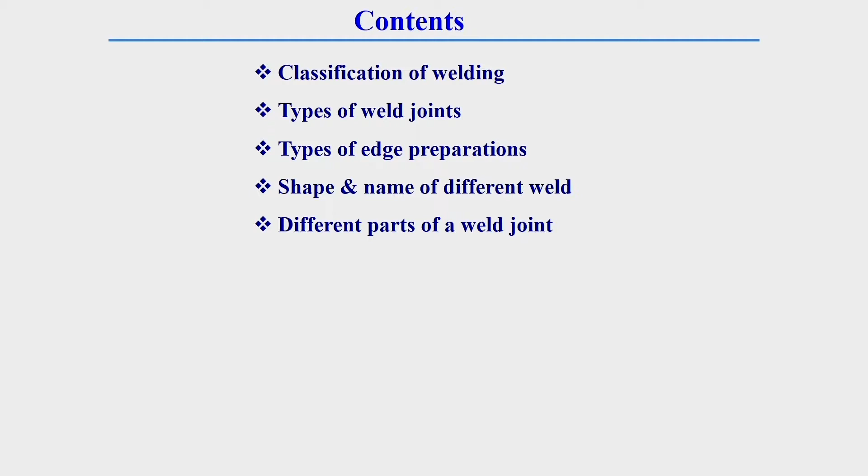This is the content of today's lecture: classification of welding, types of weld joints, type of edge preparation, shape and name of different welds, and different parts of a weld joint.

Classification of welding I already started in yesterday's class, where we saw different aspects. Based on different aspects we can categorize the welding process into 6 different categories: depending upon the source of heat, depending upon the application of pressure, depending upon the different phases of base and filler material, depending upon the composition of the joint, depending upon the position of electrode, and depending upon the mechanism. In the previous lecture I already discussed source of heat and its categories in detail.

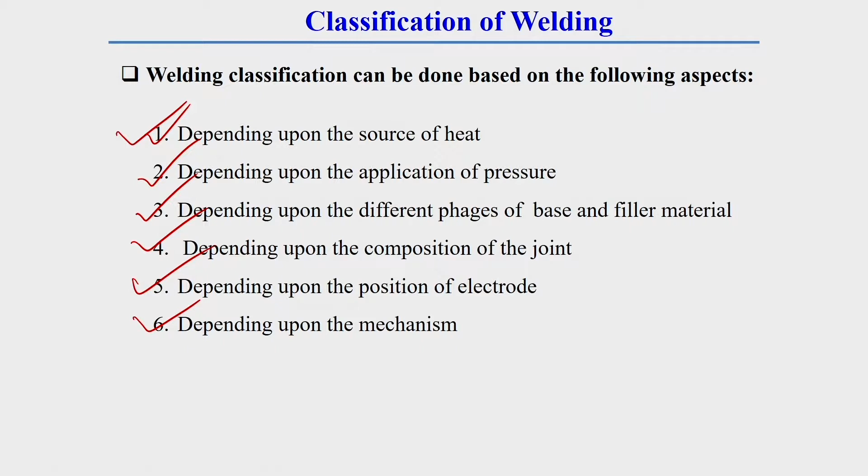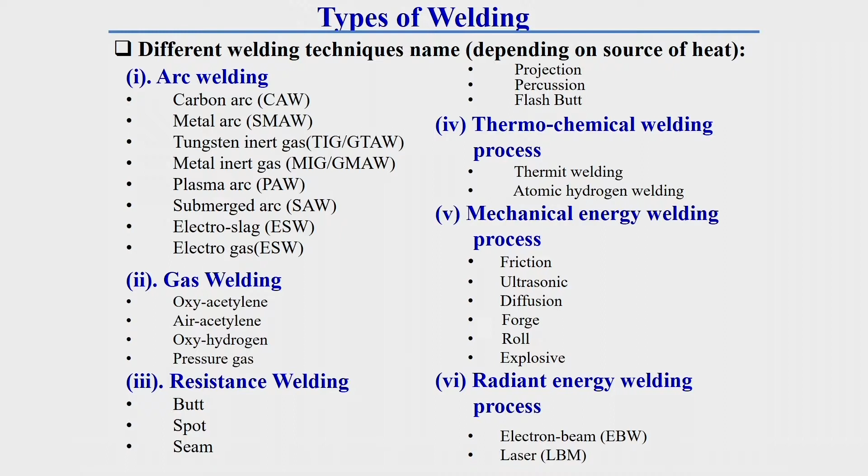This is the different welding techniques which generally categorize depending upon the source of heat, which I have already explained in detail. Now we will discuss the rest of the welding categories.

Depending upon the application of pressure, welding can be further categorized into 2 different categories: one is pressure welding, another category can be non-pressure welding, which is sometimes called fusion welding. This is popularly known as fusion welding.

Generally in pressure welding, the pieces of metal to be joined are heated to a plastic state and forced together by external pressure. As external pressure is applied for joining, this is called pressure welding. This is also known as plastic welding, because here the temperature does not go beyond its melting point. The material is plasticized and joined together, which is why it is called plastic welding.

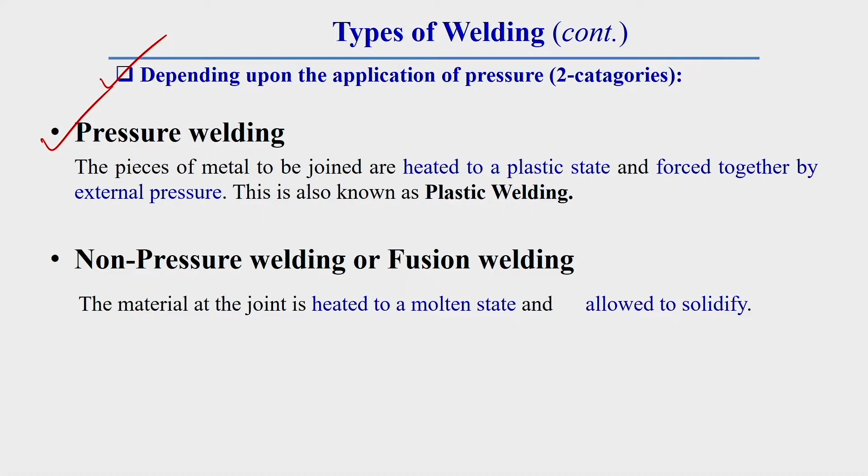Now in non-pressure welding or fusion welding, the material at the joint is heated to a molten state and allowed to solidify. Here the temperature goes beyond its melting point, so the metal becomes liquefied. No external pressure is required to join the metal. Here, due to this intermetallic fusion, that means due to fusion of molten metal, joining takes place.

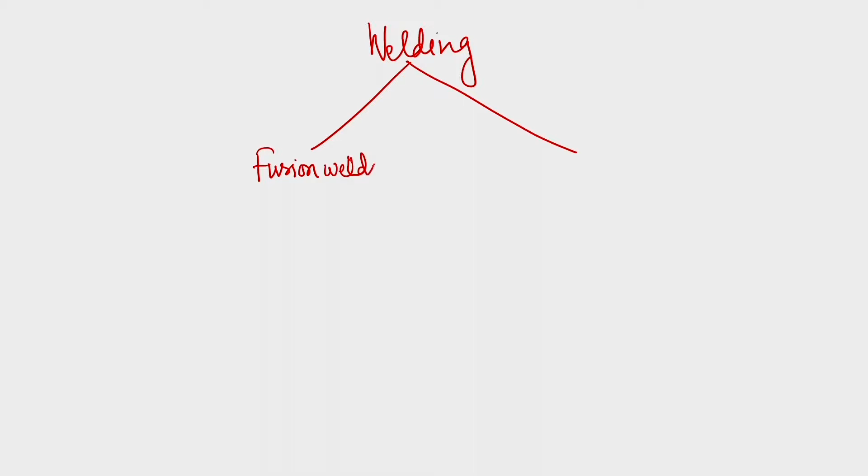Now pressure and non-pressure welding can be grouped with the welding techniques I already mentioned in classification by source of heat; similar welding categories can be put together here. Depending upon application of pressure, welding can be categorized into 2 different categories: one is fusion welding, another one is pressure welding. This fusion welding is also called non-pressure welding.

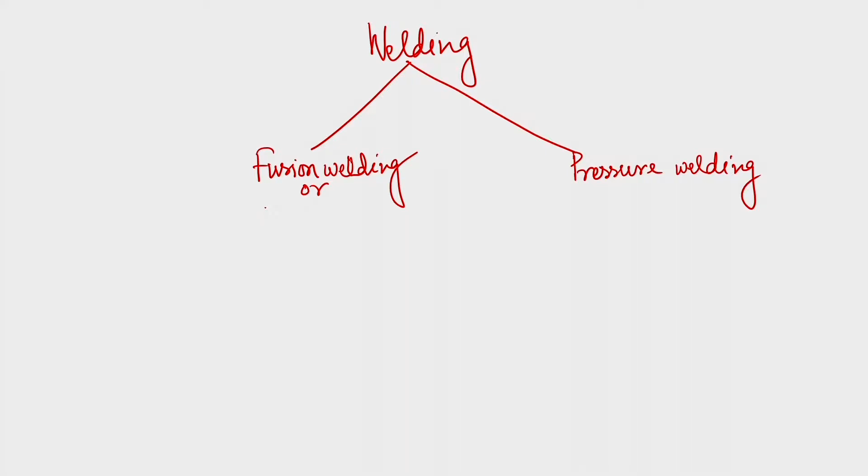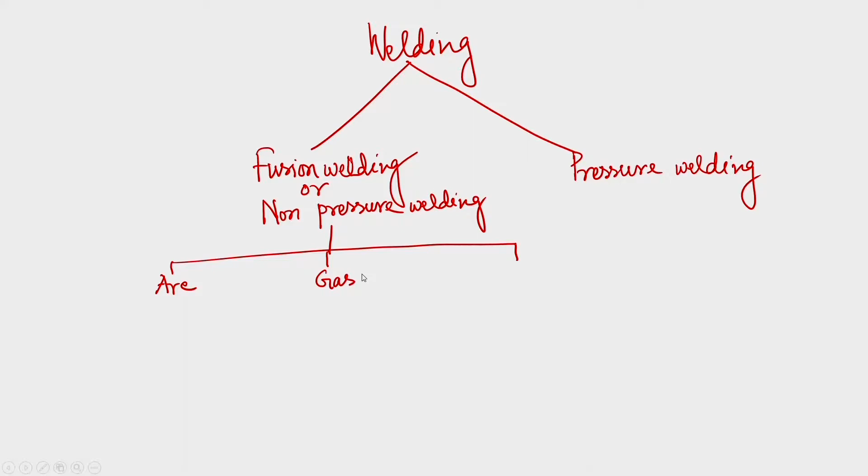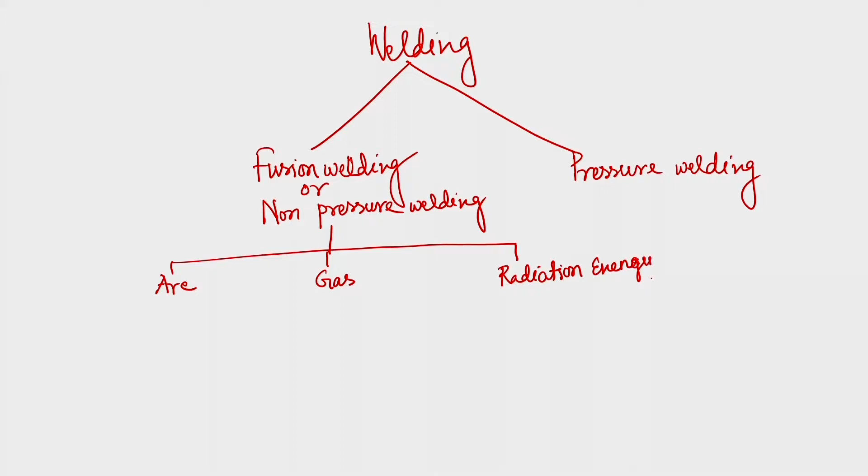In the fusion welding category falls all welding processes in the categories of arc welding, gas welding, and electron beam or radiation energy welding. In fusion welding the temperature goes beyond its melting point. These categories include all arc welding processes, gas welding processes, and radiation energy processes.

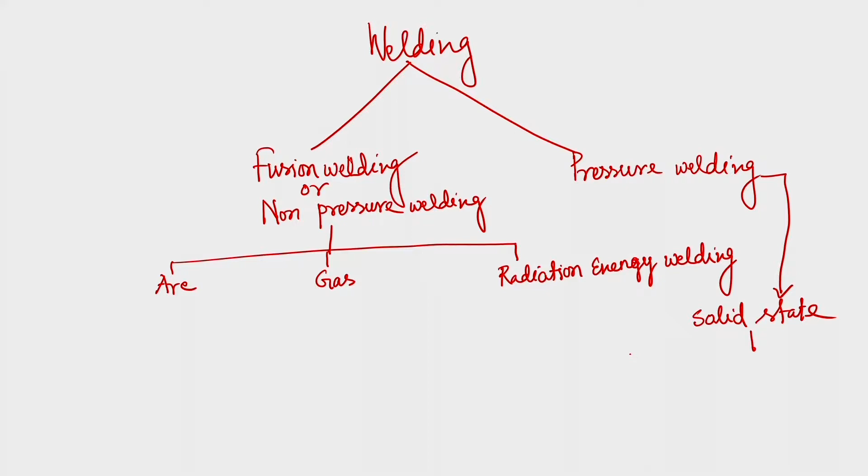In case of pressure welding, solid state welding processes generally come into these categories. This solid state welding can be grouped into two different categories: one is resistance welding, and another one is friction welding.

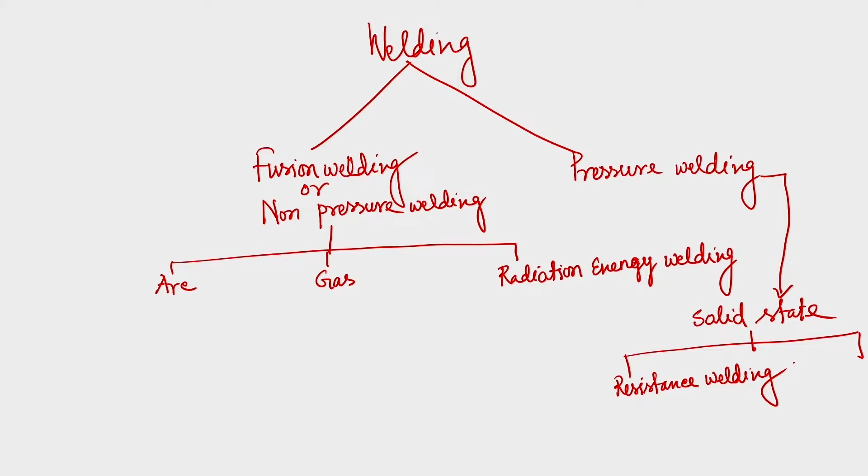So, depending upon application of pressure, welding can be categorized into non-pressure welding or fusion welding, or it can be pressure welding. Generally, non-pressure welding consists of all gas welding, arc welding, and power beam welding techniques. Whereas pressure welding techniques generally involve different types of plastic or solid state welding processes, where the material becomes plasticized and, due to application of pressure, is joined together.

In this category there can be friction welding, ultrasonic welding, cold pressure welding, induction welding, and in resistance welding there can be different types like spot, seam, projection, butt and flash welding. And generally in non-pressure welding, as I already told you, all the welding techniques I explained fall under gas, arc and power beam welding categories.

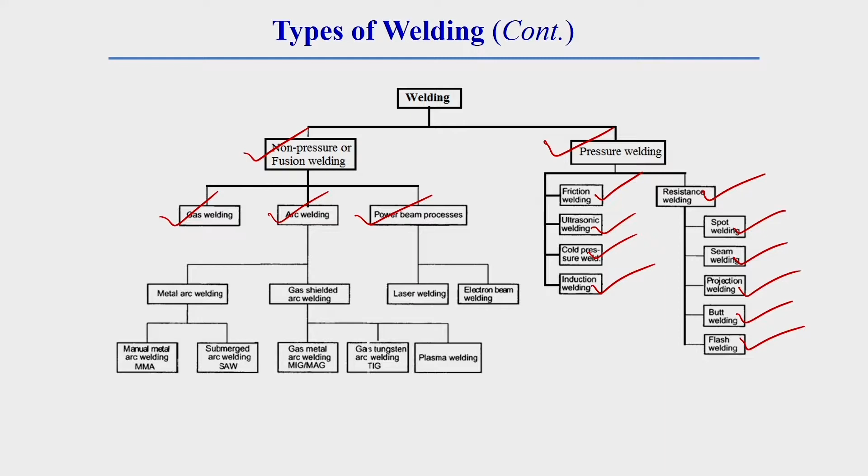Now, depending upon the different phases of base and filler material, this welding can be further categorized into three different categories. That means phases, especially whether it is liquid phase or solid phase. Generally during welding the material we are using can go to liquid state, solid state, or there can be both liquid and solid state.

So what happens if the material goes beyond its melting state, that is called liquid state welding. That means here the phase is liquid. Then in solid state welding, generally the temperature does not go beyond its melting point. Here the material is in solid state, that is why this is called solid state welding process. And solid-liquid state means one part of the material is in solid state and the other part is in liquid state, that is why it is called solid-liquid state welding.

Especially in case of solid-liquid state welding, the filler material which we are using for joining goes beyond its melting point, and the parent material which is used to join generally does not go beyond its melting point.

Generally in liquid state welding process, all fusion welding or non-pressure welding processes are in this group. Then in solid state welding, this can be friction welding, ultrasonic welding, diffusion, forge, roll, or explosive welding. And in solid-liquid state welding process this can be soldering and another one is brazing process.

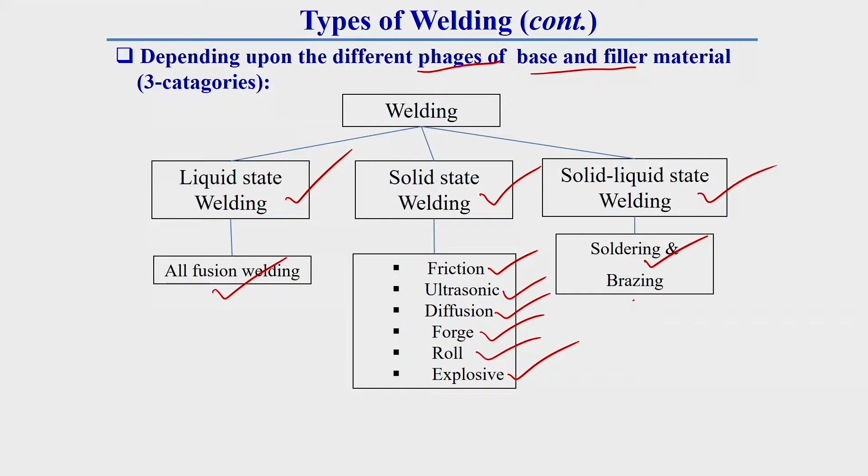Now, depending upon the composition of joint, this welding can be further categorized into three different categories: autogeneous, homogeneous, or heterogeneous. In autogeneous welding, no filler material is used during joining, that is why it is called autogeneous welding process. In this category, all solid state welding or solid phase welding falls.

Here there will be resistance welding and non-consumable welding process. Non-consumable welding process means where there is no use of filler material to fill the gap between two pieces of metal or material.

In homogeneous welding, generally the composition of filler material and the base material or parent material is the same, that is why this is called homogeneous welding process. In homogeneous welding process, all arc welding, gas welding, and thermit welding processes come.

Then in heterogeneous welding, the filler material and the base material which we are going to join have different compositions. Generally in these categories, soldering and brazing come.

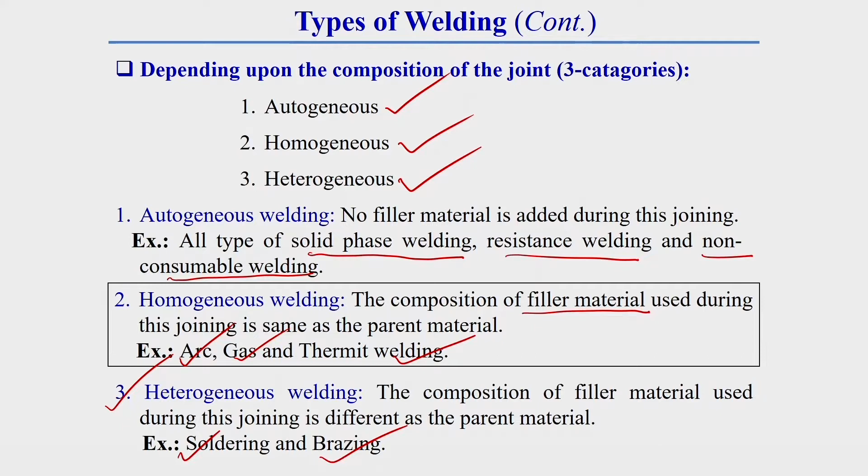Now, depending upon the position of welding, this welding can be further categorized into 5 different categories: downhand or flat welding process, horizontal process, vertical down welding process, vertical up welding process, and overhead welding process. These welding processes are arranged according to the complexity of the process.

This downhand welding process is the easiest process, because here the filler material is deposited toward the direction of gravity, that is why it is the easiest welding process. And this overhead welding process is the most complex welding process, because here the electrode or filler material has to be deposited against gravity. So this is a tough welding process, the most complex welding process according to the position of welding.

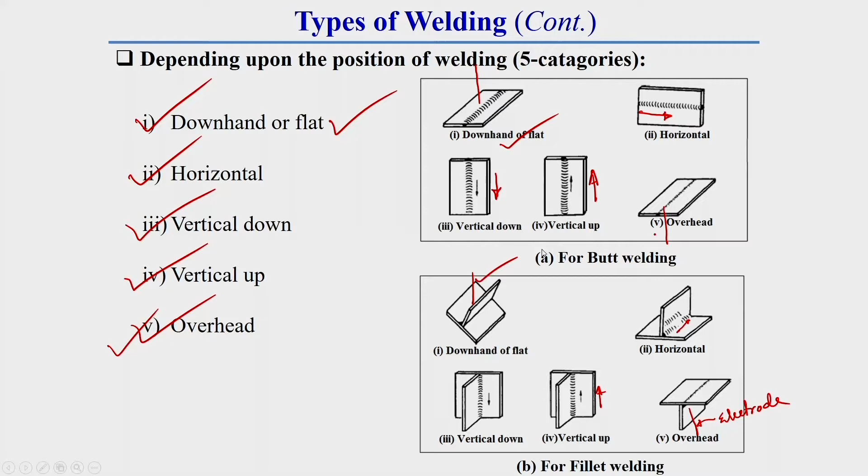And this is the overhead welding process, where the electrode is put against gravity. That is why this is called overhead welding. From this figure one can easily observe that this overhead welding technique is more tough, and the easiest welding process is downhand welding.

Now, depending upon the mechanism, welding can be categorized into 3 different categories: manual welding, semi-automatic welding, or fully automatic welding.

Before going into details about manual and semi-automatic welding, we should know two very important parameters of welding. One is called feeding of electrode, and another is called welding speed, or traverse speed, sometimes called transverse speed.

Generally, feeding of electrode: in welding, to deposit the filler material, there is a continuous movement of feed of electrode, and that has a speed. This is a very important parameter, as it decides how much molten material should be deposited along the welding region.

Welding traverse speed means what should be the speed of welding per second or per hour, that is, how much length of welding should be done per minute, per second, or per hour. These two parameters are very important.

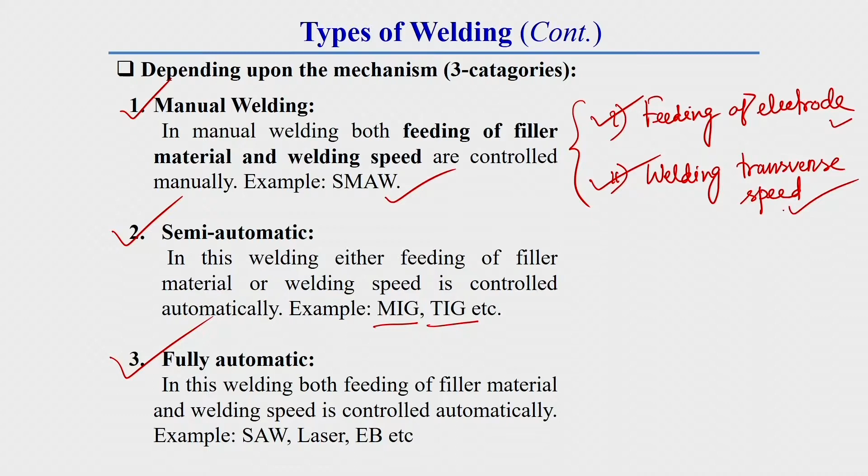Fully automatic means both parameters, feeding of electrode and welding traverse speed, are controlled automatically. In this category there are many latest welding technologies, like submerged arc welding, laser welding, and electron beam welding.

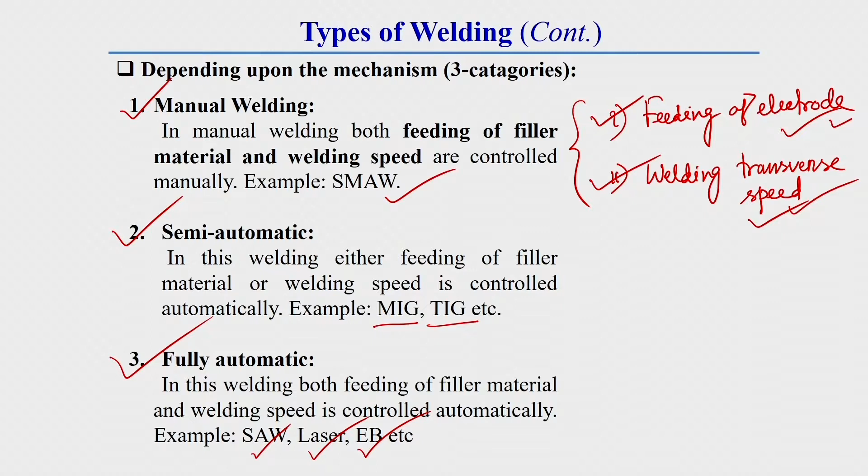We have already discussed different welding processes. Now we will see the different types of weld joints. Generally, there are 5 different types: butt joint, T-joint, lap joint, corner joint, and edge joint.

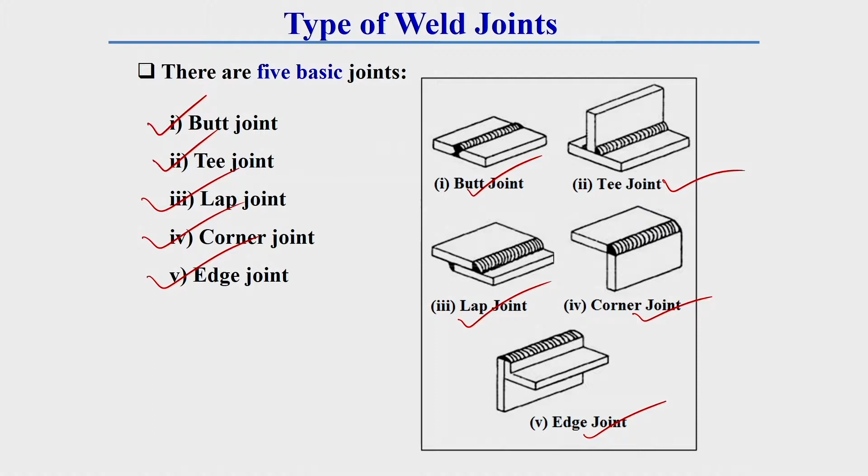Before going into details about butt welding and different types of welding joints, I will discuss edge preparation of weld joints. Edge preparation or edge shaping may be applied to each piece in the same way, or a combination of joint preparations may be used. The edge preparation for a welding joint depends on strength requirement and other design considerations.

There are generally 6 different edge preparations commonly used for welding joints. These are square edge — in this preparation, the edge of the workpiece has a shape which is square in nature.

That means there is no edge preparation. So that is why this is called square edge preparation.

Then the second edge preparation is bevel edge preparation. In this category, a bevel type of shape is provided - this is bevel edge preparation, where a shape of angle is put in the workpiece.

Double bevel edge preparation is generally used for thicker sections, where the bevel angle is made from both sides of the plate, top as well as bottom.

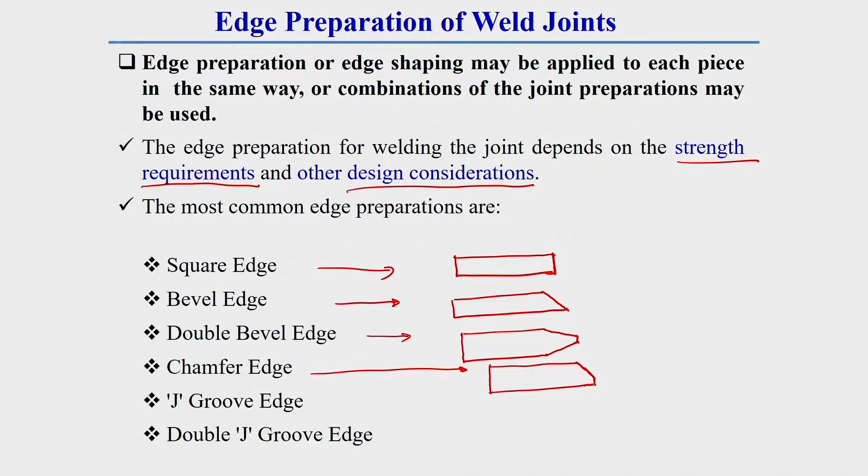Then in chamfer welding, the chamfer edge preparation looks like a bevel with a root face. This is generally the chamfer type of edge preparation.

There can be J groove edge preparation, where the edge of the plate looks like a J shape. This can also be double J groove, which is generally used for thicker weld plates.

From this side as well as from this side, this is generally double J - from the top side of the plate as well as the bottom side, edge preparation is done. So these are all the edges which are generally prepared for strength requirement or design consideration of the welded joint.

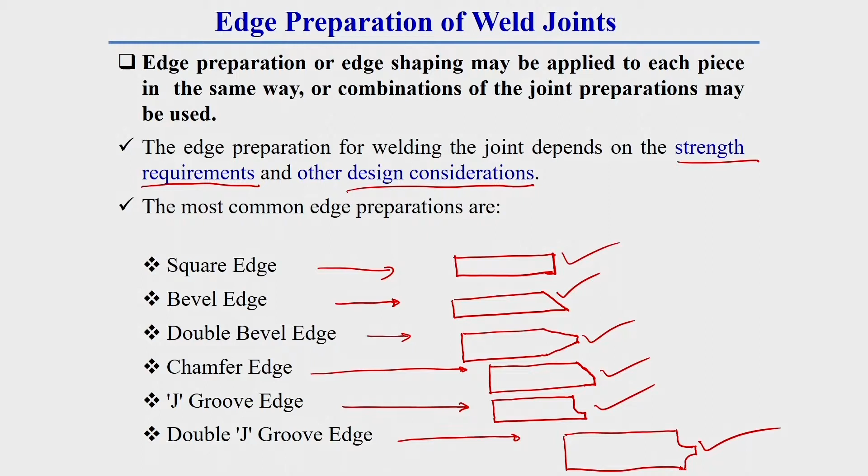So there are generally 6 different types of edge preparation. Now depending upon the weld joint and edge preparation, all welding has been categorized into many different categories, like different butt joints with their edge preparation.

By applying different edge preparation in butt joints, there can be different types of butt welding joints. Here generally the edge preparation is done - in the first category, square type edge preparation is done. That's why this welding process is known as square groove butt joint.

Because here square edge preparation is used for which type of joint? Butt joint. Now before going into details about all these categories, we should know what a butt joint is.

A butt joint is formed generally when the pieces to be welded are laid side by side - this piece and this piece laid side by side. So all the joining categories, all the weld joints shown here, are all butt joints - different types of butt joints.

Here generally bevel type edge preparation is made, that's why this welding technique's name is bevel groove butt joint. Here, as this bevel is made on both top and bottom side of the plate, that's why it is called double bevel butt joint.

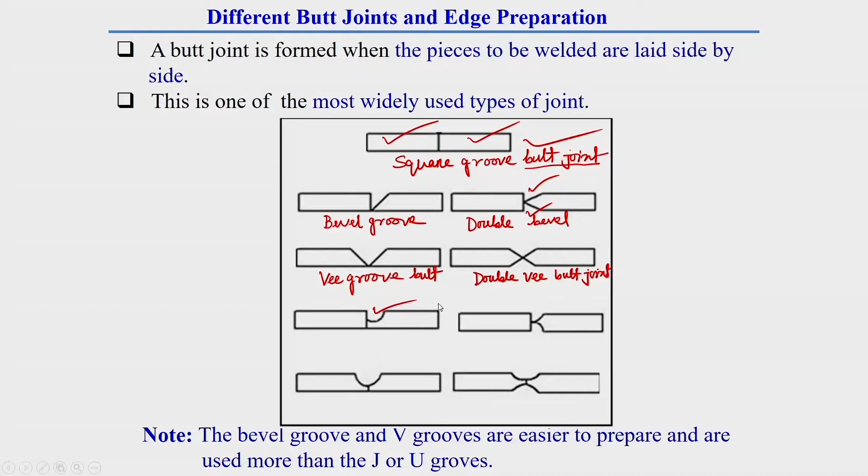Here, as this V is put on both top and bottom side, that's why this is called double V butt joint. Similarly, as this J shape or J edge preparation is made here, that's why it is called J groove butt joint.

As this J is put on both top and bottom side, that's why it is called double J butt joint. So in this way, depending upon the edge preparation and type of joint, there can be different types of welding joints for butt welding categories itself. So this is generally called U groove butt joint.

Because here the shape of the edge preparation looks U type, and this is called double U groove butt joint, because here both top and bottom side U groove is made.

Now we should know a little bit why this top side, bottom side, why double side, single side edge preparation is required. This edge preparation in the welding joint is required because of different reasons. The main reason for this edge preparation is that proper accessibility of filler material in the welding or joint region is very much essential.

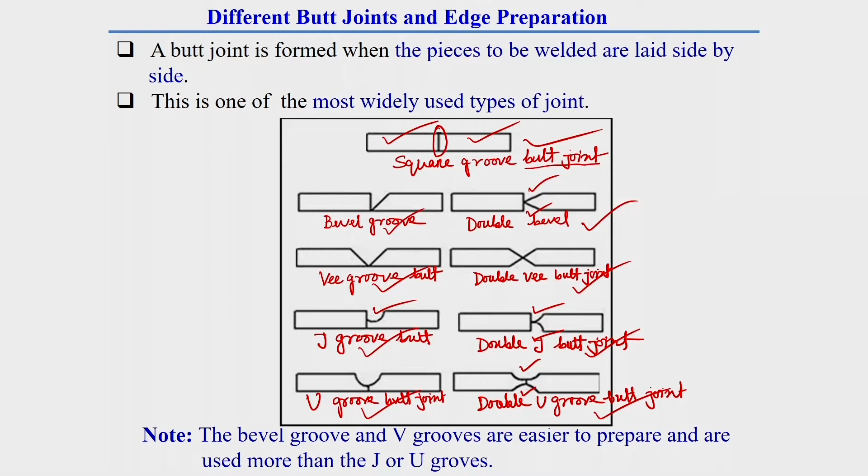Now the T joint. A T joint is formed when one piece of metal to be welded is placed vertically on another piece lying horizontally, to form the shape of an inverted T. Inverted T means this is the inverted T shape.

In this T joint, the bottom piece is called the flange, and the top vertical one is called the web of the structure. The vertical member is placed at an angle of 90 degrees to the horizontal member.

The type of weld used here is generally called fillet weld. The joining done in fillet welding is called fillet weld. The fillet weld resembles a triangle when viewed from the side of the structure, from the side of the welded joint.

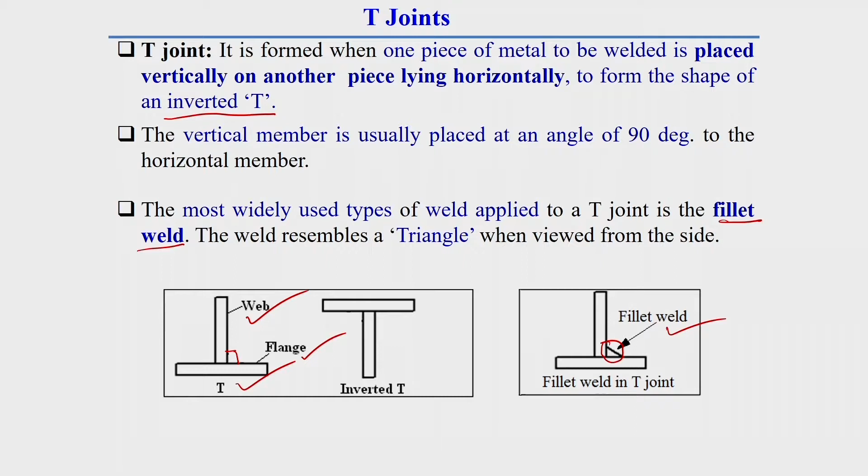Now different types of T joints are explained. This T joint's vertical piece can also be prepared using a bevel or J shape. If the bevel shape is made, then this is called a bevel T joint, because here the vertical piece preparation is done in a bevel shape. That is why it is called bevel T joint.

If both sides of the vertical piece are beveled, then this is called double bevel T joint, because on this side and this side, both generally have a bevel made.

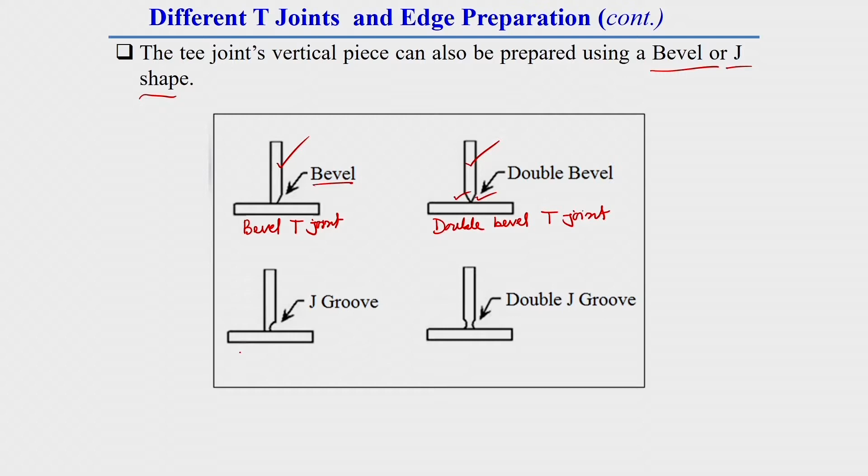If in a vertical piece a J shape or J groove is made, then that is called J groove T joint. And if this J groove is made on both sides of this vertical piece, then that is called double J groove T joint.

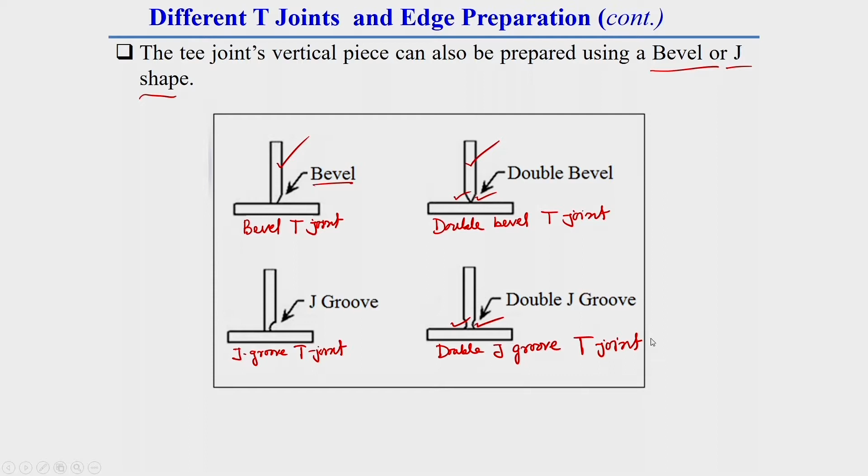Now different types of lap joint. First we should know what a lap joint is. A lap joint is formed when one piece to be welded is laid down and another piece is overlapped to form an edge for fillet welding or an area to allow plug or slot welding. That means two pieces of material are put together and overlapped with each other.

This lap welding can be divided into three different categories depending upon the joining process: it can be fillet welded lap joint, plug welded lap joint, or slot welded lap joint.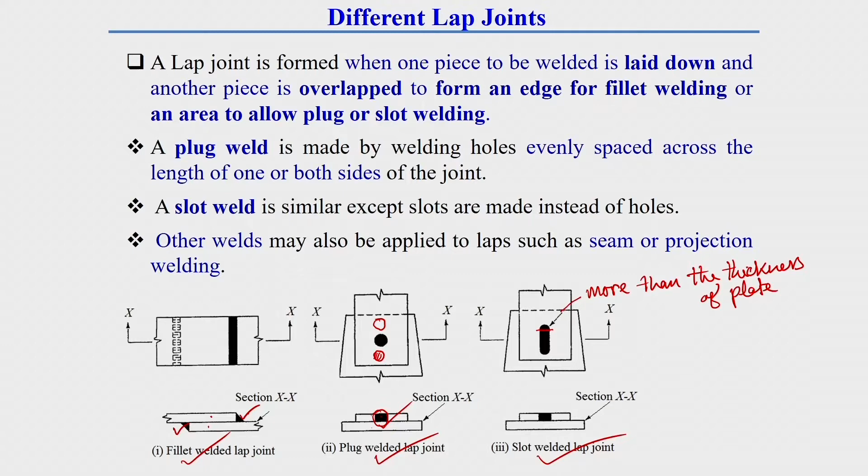the thickness of the plate. So the difference between plug and slot welding: in plug welding, a circular hole is put, whereas in slot welding, a slot is put. Apart from this, other welds may also be applied in lap joints, such as seam or projection types of welding.

Now, different types of corner joints and their edge preparation. A corner joint is formed by placing one piece to be welded on the other, so that a corner is formed. It may be flush, half open, or fully open categories.

For proper penetration and strength, an edge preparation may be applied to one or both of the pieces of the joint. There are different categories of corner joints, where generally a corner joint is formed by placing one piece to be welded on the other, so that a corner is formed everywhere.

This corner joint, depending upon its edge preparation, can also be of different types. The first one is called flush corner joint. The second one is called half flush corner joint.

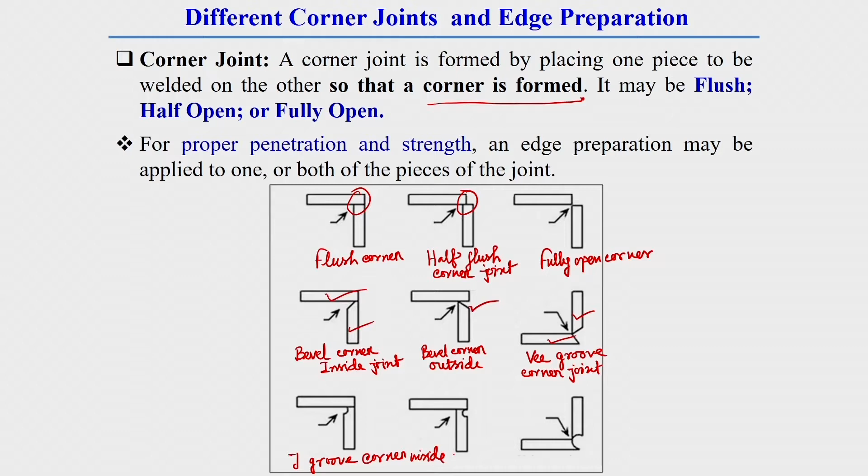This one is called J groove corner inside joint. Here the J groove is made inside, that is why it is called J groove corner inside joint. Here the J groove is made outside, that is why this is called J groove corner outside joint, and this one is called U groove corner joint. Here a U shape is made, that is why it is called U groove corner joint.

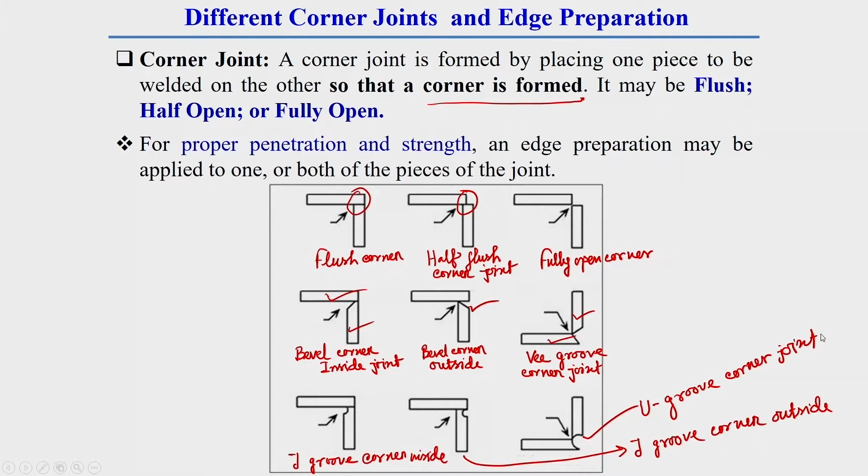Now these are the different categories of edge joint and their edge preparation. An edge joint is formed when the two edges of the pieces to be welded come together.

This joint is not as widely used as other welding processes like butt, corner, or T joints, which are the joining processes widely used, but this edge joint is very rarely used. Here, the first category has no edge preparation, that is why this joint is named square groove edge joint.

This second category is called bevel groove, made in one plate or one piece of material, that is why it is called bevel groove.

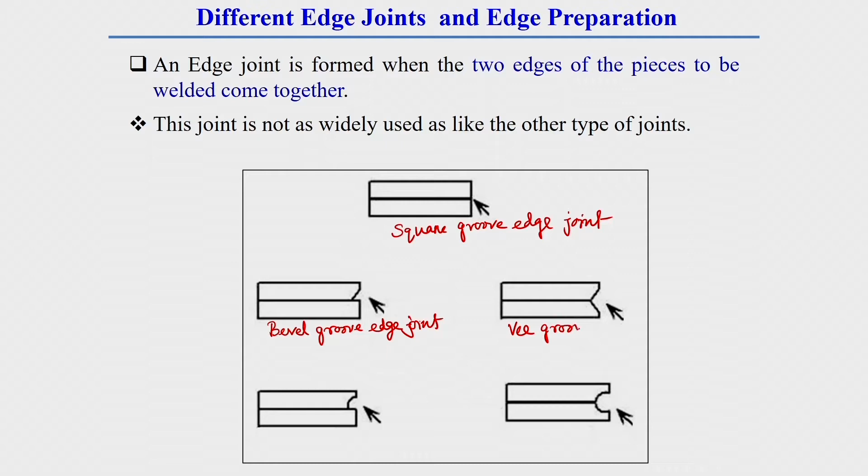Edge joint - so here will be the edge term, that means edge joint term. This will be V groove edge joint.

Here as J groove is made, that is why it is called J groove edge joint. And as here the U groove is made, that is why it is called U groove edge joint.

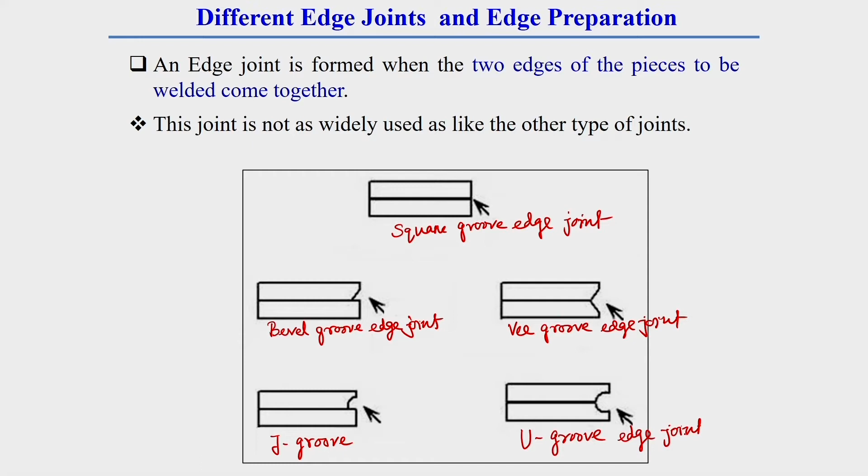These are all different categories of weld joint and their edge preparation. These are very important things which are very much essential once you will be in industry.

Now here these are all joints you have seen. Now we will see what are the shapes of weld of all these joints. The shape of the weld can be butt weld, the shape of the weld can be fillet weld, or the shape of the weld can be compound weld.

So butt weld is done along the thickness direction of the plate, whereas fillet welding resembles triangular shape, which I have already explained. If in a structure there is a combination of 2 or 3 different types of weld, then that weld is called compound weld. Here you see both butt as well as fillet welding part is there, that is why this is called compound weld.

So there can be edge weld whose shape looks like this. Generally this weld is put at the edge of the plate, and I have already explained about plug welding and slot welding also.

Plug welding, here the shape of the weld, once you see the side view, looks like this, and once we see the slot welding it looks like this. But in case of plug weld, generally there is made a circular hole.

In case of plug weld and spot weld, generally this is actually slot weld, not a spot weld. This is generally slot weld. Here instead of putting a circular hole, generally a slot is put with round shape at the edge of that slot.

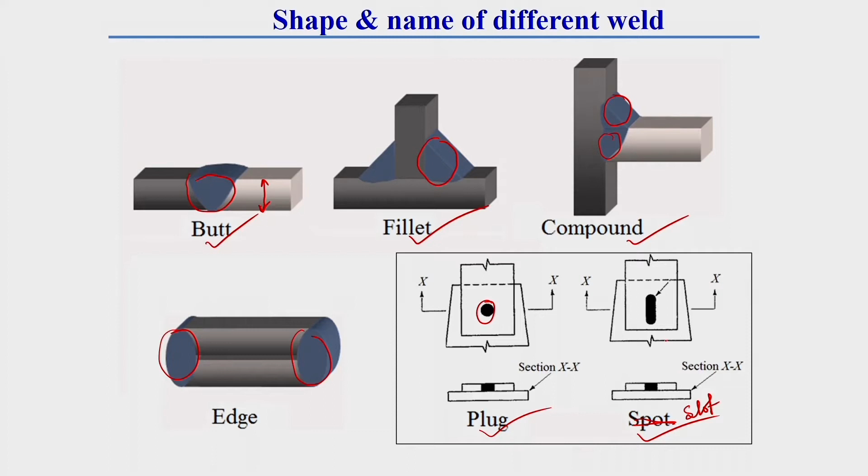Now we will see what is the name of different types of butt weld and their joint. Here you see, once we go for filling this gap, this name - what should be the name of this, or what we should write in this gap - that we should know, like shape and name of different types of weld.

Here you see, as the butt welding is done in butt joint, that's why this name should be butt welded butt joint.

Here in case of butt joint, as the triangular shape weld is made, that fillet welding, that's why it is called fillet welded butt joint.

In this case, two different thickness plates are laid side by side - this is one bigger thickness of plate, this is another smaller thickness of plate. So here generally two different types of weld are made here. One is generally butt weld, and this triangular shape outside of this thickness is generally called fillet weld.

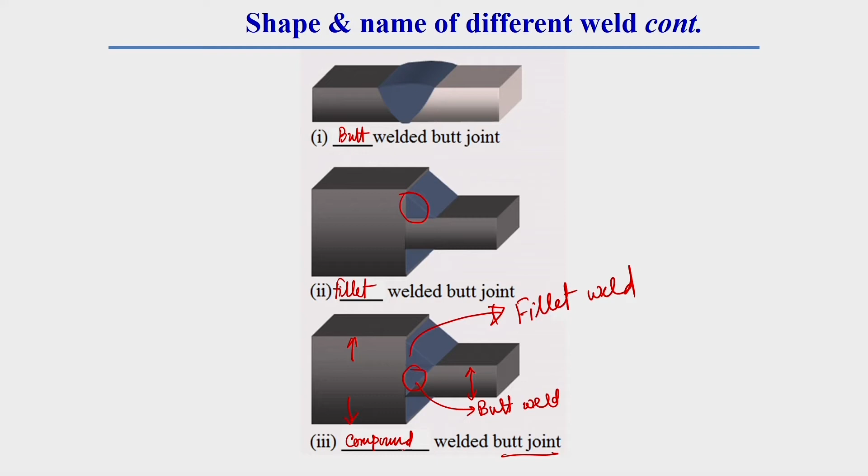These are all weld. As these two different types of weld are put together, that's why in case of butt joint this is called compound welded butt joint.

Now similarly for T joint also, here the weld which we made is triangular in nature, and that's why this triangular shape weld is called fillet weld. That's why in this gap we should write fillet welded T joint. So this is a type of fillet welded joint - what type of joint? This is T joint, that's why it is written like this.

This welding is done along the thickness of this plate, that's why this is called butt welded T joint, and a T is formed, that's why it is called T joint. As these all are T joint, that's why this is called T joint.

And here both fillet as well as butt, generally we do it both. This is generally fillet weld and this is generally butt weld - as here we made a combination of two different types of weld, that's why it is called compound welded. What type of joint is this? This weld joint is T joint, that's why it is called compound welded T joint.

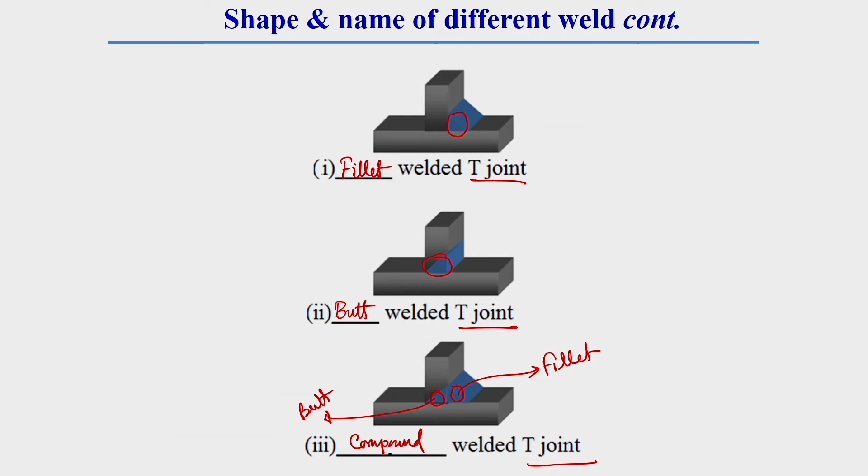Now here these are the different shapes and their names.

For corner joint also, this can be different shape and its name also. We can put different weld names here, and we can have different weld types. In case of corner joint, we can have different types of weld names.

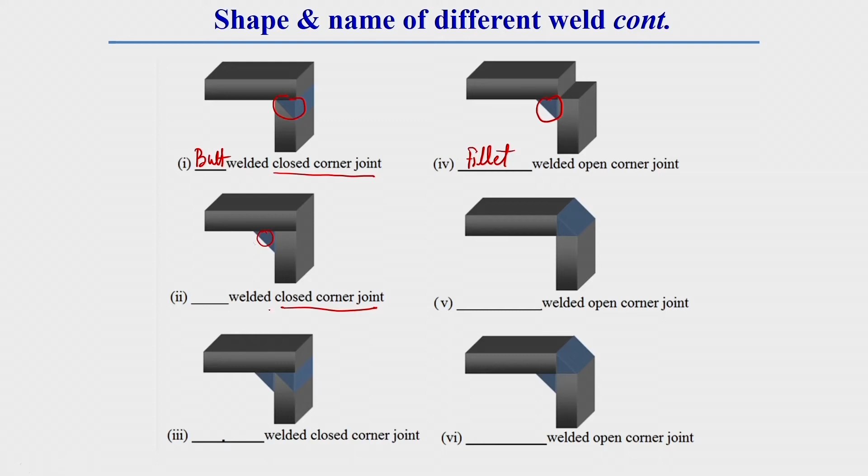Here generally this fillet welding is done in case of a close corner joint, that is why the name of this welding will be fillet welded close corner joint.

Here generally another fillet is done inside, and as the fillet is done inside, it is called inside fillet welded close corner joint.

Here this fillet is done outside the joint, that is why this has a name which is called outside fillet welded corner joint.

Now here both butt as well as fillet welding is done in case of close corner joint, that is why the name of this welding is compound welded close corner joint. Here you see this plate is put and which makes a close corner.

Here also you see both inside and outside fillet is made here, that is why only one type of weld is made, there is not two types of weld. As here only one type of weld is made, that is fillet weld. This is also fillet weld type and this is also a type of fillet. So here generally there is not two different types of weld, that is why this is not a compound welded open corner joint.

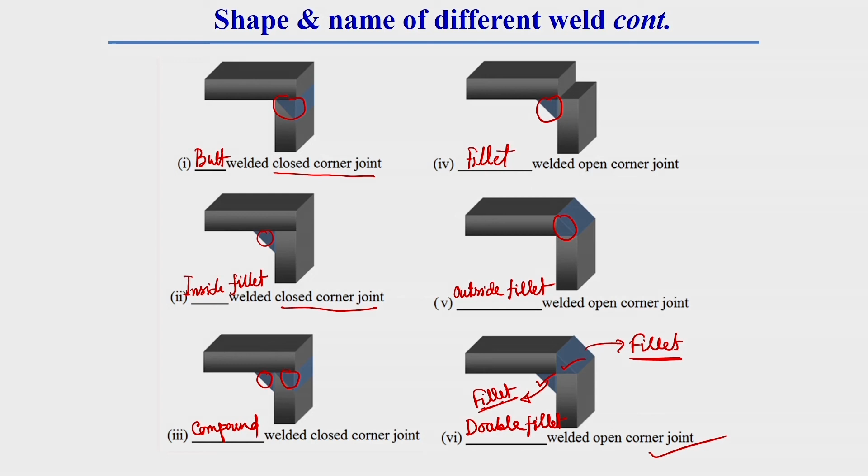Now this is very important, because once we are in industry, generally we will be given some sort of drawing or data sheet they will provide us, and there will be written some sort of name like butt welded close corner joint we have to do, or fillet welded open corner joint we have to do. If it is written like this, we should see the name or the data sheet itself, and we can do all types of preparation and all types of welding according to the data sheet, if we know the nomenclature of different welding joints. If we know the different welding joints and weld names, then we can easily be able to do that work very easily.

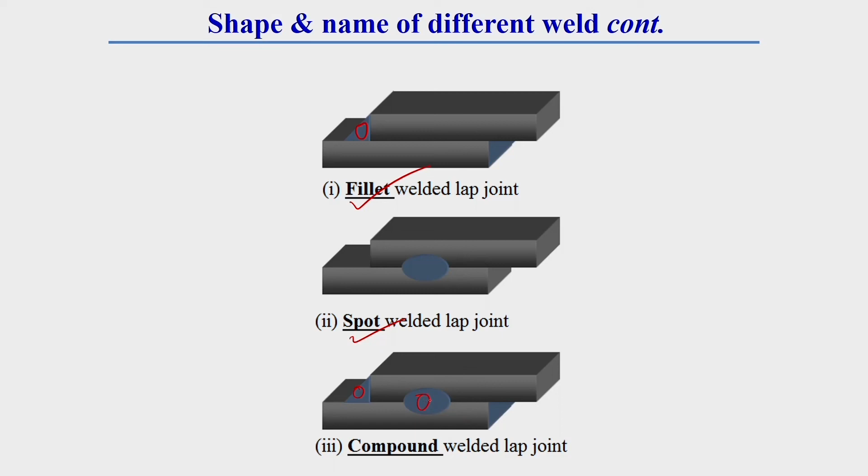Here both fillet as well as spot welding is done. Here you see this triangular shape weld as well as this spot weld shape also we made, that is why this is called compound welded lap joint.

Now different parts of a joint - we have already discussed about different categories of welding process, different categories of welding joint, different types of weld and different types of welded joint, that we have explained in details. Now we will go to what are the different important parts of a weld.

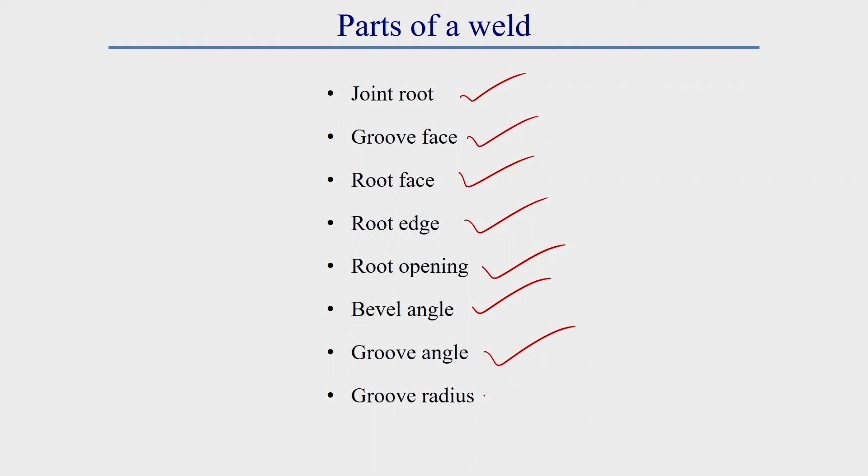In a welding there are 8 different parts: joint root, groove face, root face, root edge, root opening, bevel angle, groove angle and groove radius. These detailed parts of a welded joint I will explain in next lecture.